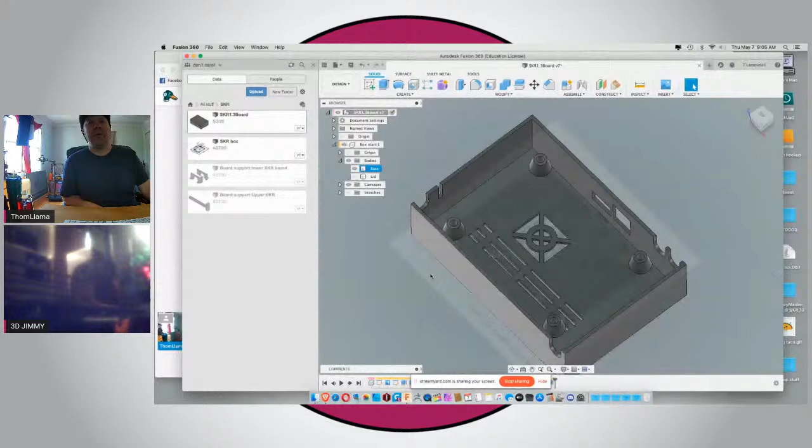So you're going to make a new brain box today? Yeah, I already started the other day, that's what the picture is of. Are you going to put a Pi mount, finish it up with a fan and all the fancy stuff? The other one actually had a fan on it. It's got a fan cut with screen wires running through it, but I never put the fan on because I never put a cover on it, so it's never needed it.

Almost all of these processors, people don't realize, if you put the heat sinks on them and leave them in open air, they don't need fans. Fans are for emptying the air out of the box because heat builds up in the box. If there's no box, there's no buildup of heat, within reason. They will overheat if you leave them in the sun, but if you set them standing up, heat travels up, so as it heats up the air naturally flows over it. Convection, yep.

That was a pretty cute little printer Angus had there yesterday. Yeah, that was kind of neat. I only watched like the first half hour of it. When he actually got it printing I was amazed. That thing obviously used the M3D Micro base case. There's a lot of changes in it, but the base idea, the case, the cube, is almost exactly an M3D Micro. It's definitely an improvement on the M3D Micro. I didn't watch the whole thing.

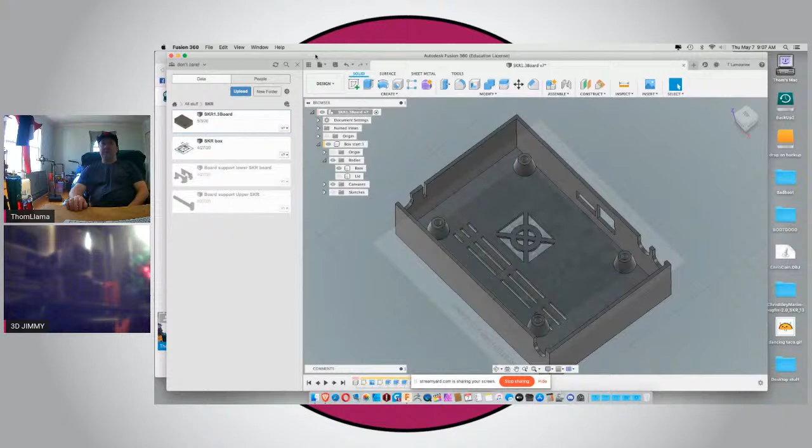Yes, you were whining last night. I was whiny. I can't believe I drank that whole thing and I feel as good as I did. There's literally nothing left in the bottle. I know you're just on the mini screen, but you can see that, that's all that's left, I drank the whole thing myself. I went to bed last night thinking wow, I drank a lot of wine. Got up this morning like, wow, I don't even have a hangover. I don't feel 100% though. I will say I am definitely feeling the side effects of drinking a little too much last night. And I didn't even get that crazy, usually I get a little extra goofy when I start drinking.

Yeah, it looks like the wine mellowed you out. Yeah, I was going to say, I think toward the end I was getting more and more mellow. I was more hyper in the beginning than I was at the end. You were kicking back with your feet up on the desk. I do that anyways.

Okay, what else do I got to add to this thing? Where's the Pi mount? It'll be on the lid right here. Okay, when I get that far, I'm not even worried about that right yet, I just want to get the board made up. Because the biggest thing now is, with the box I have it in now, I just slapped it in there. I just made a box, put some vents in it, and cut some holes in it for these things for the wires to come in.

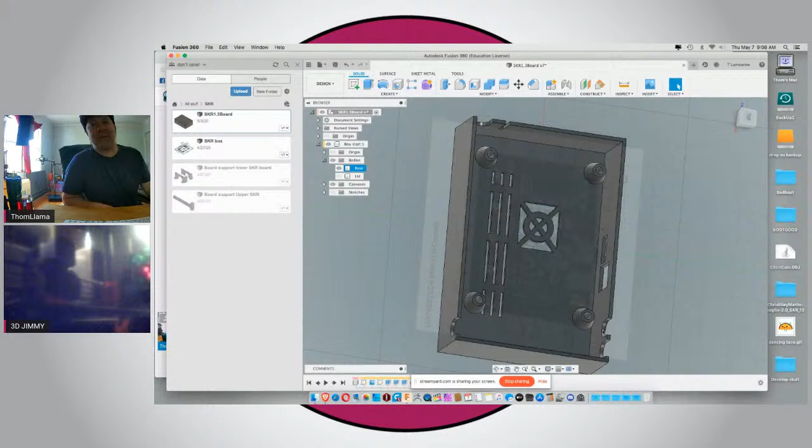But I didn't leave access to my SD card and the USB access, which—I made the box big enough so I can get them in there, but it's a pain in the butt. Otherwise I just keep the box, there's really nothing wrong with it, it's just I can't get to the USB plug and the SD card.

Put some vents in the top. I will, I put them underneath the Pi when I set the Pi mount up, so it draws air over the Pi as it pulls it in. This is really the only place right here at the processor and behind the drivers—if you keep those cool, everything else will convect out through the board. Those are your two hot spots from what I understand. And the MOSFETs a little bit.

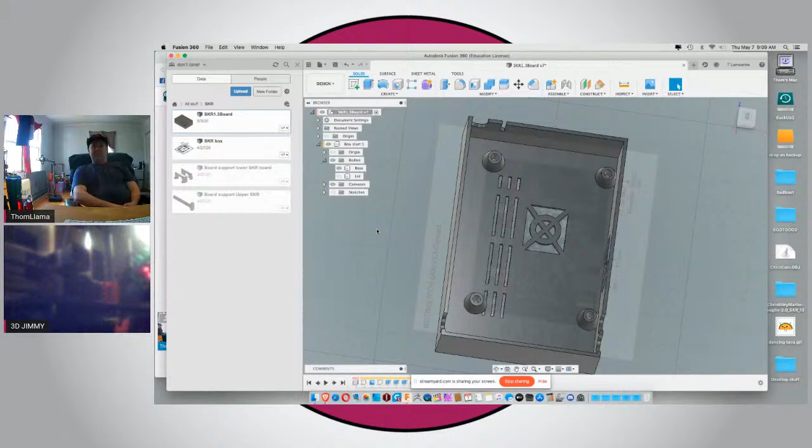Yeah, I didn't think of those, maybe I'll put some vents. I almost think this is too big right here, I should probably make this smaller because it's going to overdraw here and not draw air out of here from the fan.

And actually, I think in the lid, I'm going to put inside the lid here, right where the stepper drivers are. I'm actually thinking I'll put a channel in it, then put the fan right here above the drivers. That way it's got airflow right over them. That makes sense.

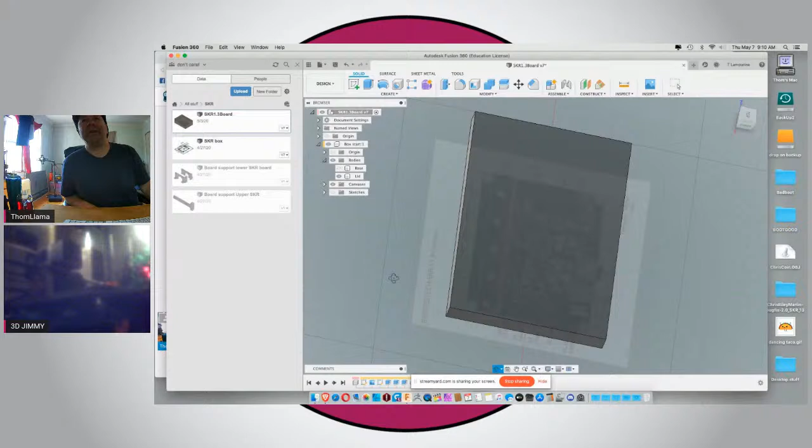Even if it's not directly vacuuming in front of it, it gives it a kind of channel. It'll draw out through the channel. The channel will direct the airflow, it's not really going to restrict it. It'll still pull from the sides and everything, it'll just have a direction. Hopefully, that's my concept. I have no aero, fluid, any kind of dynamic knowledge other than, okay, I read this might work.

I have no actual education in there.

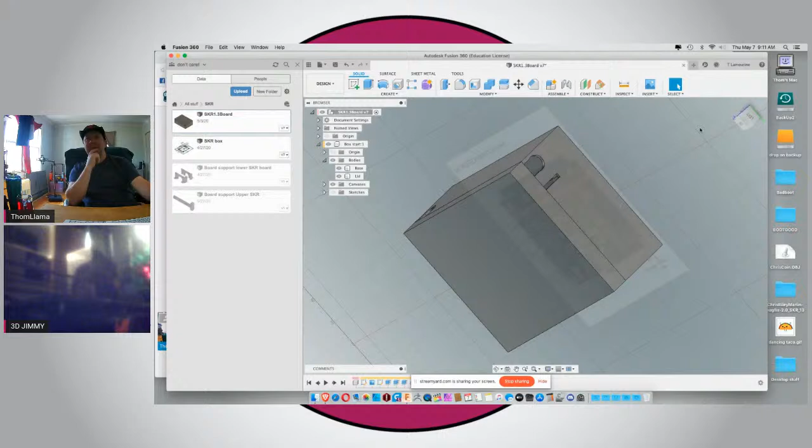Oh, I got to put the fan port in there, which I can't do because I moved it over here, didn't I? And yeah, so I really can't do that because the fan's going to go right here and it's kind of offset, which is kind of annoying. I got to figure out a different way to do that now that I think about it.

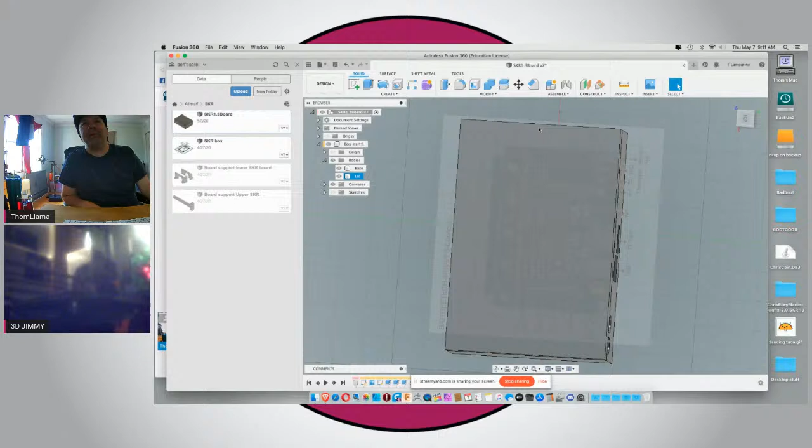Because the biggest problem are the stupid ribbon cables right here. I don't know if you guys can actually see that, but the ribbon cables plug in right here at the LCD, and then they go along the top of the box and come out this slot, which is fine. The problem is they're big and flat and obnoxious, and they don't fold easy, and it's just obnoxious. And if you put the fan right here at the top, they end up blocking it. There's just no way around it, you can't get them to go neat. I hate ribbon cables, ribbon cables are obnoxious.

I really wish... actually, I think someone does make a regular cable bundle style ribbon cable, don't they? It's round. Can't you just split the wires and wrap them?

Sure, probably, but then you were talking about me doing it, and that's where the problems arise. Because I'd end up screwing it up somehow. Well, it was a thought. I would short something out or strip something wrong or make something screwed up, something would not be correct. Well, then it wouldn't be a proper llama string.

Yeah, what else am I missing? I feel like I need another hole on that side, and I can probably do with just one hole on this side.

So I think I want to bring it into the bottom. Do I want to bring these into the bottom? Do I have enough oomph? Instead of bringing them into the side. I don't know, I don't mind throwing it in the side, I guess.

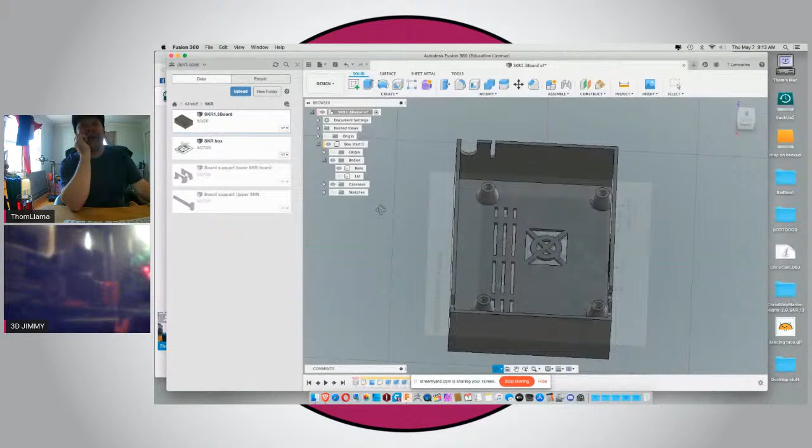Well, this is bigger than every other one, like the Prusas and stuff. Because the biggest thing I have is I'm holding it a lot off the back, it's spaced up off the floor of it. And I was thinking that some of the thermistor wires and stuff I could actually run behind the board.

That's why it's up like, I think, what did I do that at? I wish it would let me select a face like I always want, and then that stupid thing would hide. How high did I make it? 12 millimeters, which is a lot.

So that gives me a lot of space where I could literally run wires behind the board. Like even with the plug, I should be able to slide the plug and everything for the thermistors and limit switches and stuff like that. I should be able to just run behind the board, that way they're not out in front being tangled up with everything else.

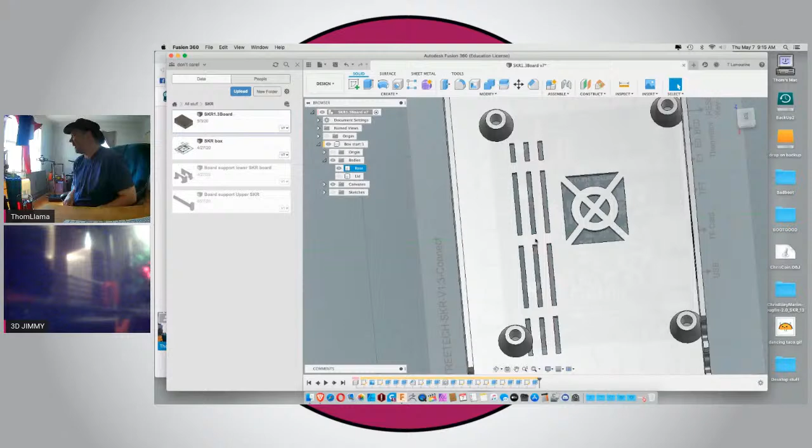Because the biggest mess is like the Z motor and stuff. The Z motor, I got that splitter on it that I did make myself, and it actually works. But it is kind of big and bulky because I'm not great at soldering, so I made everything a little big and long, and it's kind of obnoxious. But it does work, so I'll give myself that one.

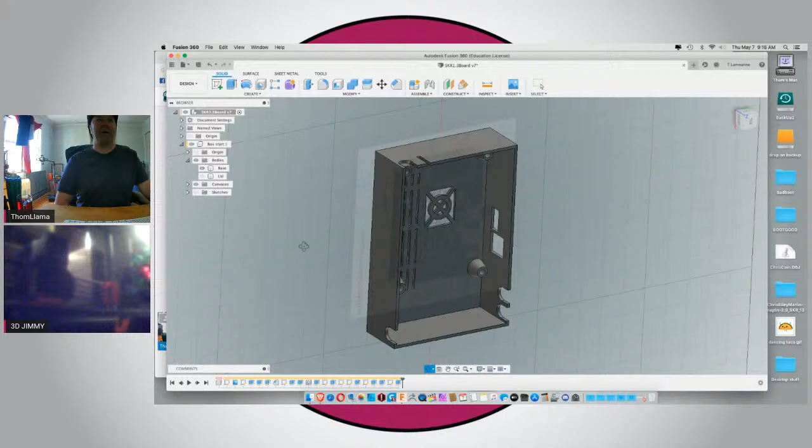And I think I want to space it off the frame. So what do I need to put in here? Some holes, that's what I need. Top. I can close that out so I have more space. So those two are there, that one's there. What else? The fan, I want the fan in here.

I need to put a fan hole.

What got moved? Yeah, just hit capture position. It won't hurt you, it's good for it. Nothing should have moved, why was it moving stuff? I didn't move anything, I didn't want anything moved. Oh well, I'll figure it out. There's no movement thing in the timeline, so it went away.

All right, so a fan is 40 millimeters. But the actual mounting hardware is a different size, and I can never remember. You can pull in a 40-40-10 fan from McMaster Carr. Yep, I could. Or quicker, I could just measure it.

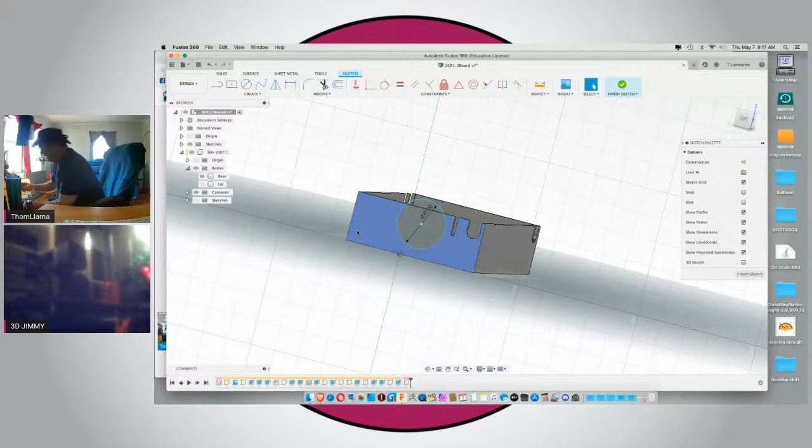31.9. I bet it's actually 32. At least that'll be close enough. Yeah, 32.

So I do this, and I come out... wait a minute, how's that possible? That can't be right. I didn't zero out my little calipers. No, it's still 32. How is that possible?

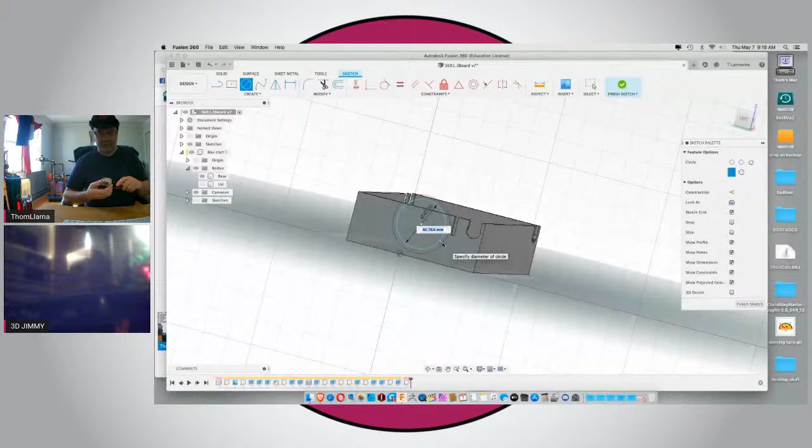Isn't this supposed to be 40 millimeters? Oh, because it's inside of it. That's right. No, that is right.

Escape. I need a square box from the center, because then it'll do it. Yep, 32. 32, tab, 32. And that puts my little mounting holes where I want them.

And let's bring the lid back because I'm going to want that. Oh, and then I just screwed up my box because I didn't enter it. 32, tab, 32. Turn.

Then I can draw my little sketch, make this thing in construction so it doesn't screw with me, make these things. I want it like 4 is good.

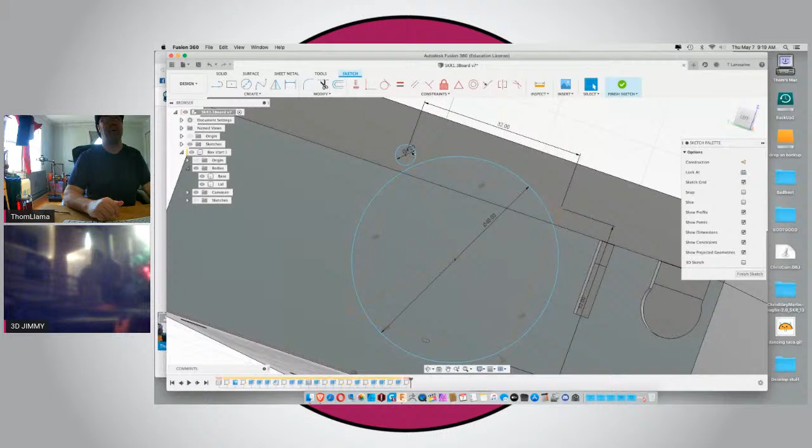Okay, I wish it would let me select them all and do equal. Yeah, I hate that, it used to. I remember back in the beginning it did. I could select that as the key and then just select as many stupid little circles as I wanted to, and it would just make them all the same. Now you've got to sit there and click back and click back and click back and click back and whack!

Oh crap, dimension, let's see. Dimension this to this, what is it? 25. Dimension this, this is escape. 8. That was 25. I don't remember how big I made this box. The thing I liked about Unigraphics, 27.

So if I make it 26, I could create a parameter by picking the 2 corners of the box, and it would become a parameter, and it would stay associative to whatever I did on the model unless I destroyed it. Yeah, you can do all that. It just becomes confusing to me. I should start using it because it actually makes it less confusing in the long run.

But let's see, we have it at 50, so I'm going to go 52 and shift it away a little more, even though I probably shouldn't. But I want it away from the tables.

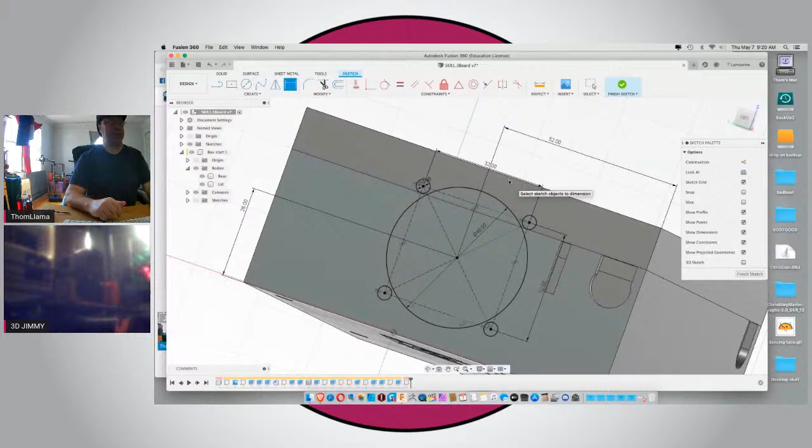Escape. I want to put a hole right here somewhere, doesn't matter where, about 6 millimeters for the wire to go through. Let's lock it in place just with any old random number. 20 sounds good.

And we'll lock it this way off of this side, since that's the side I'm using for everything. We'll go... 79 sound good? Let's just go an even 80.

Okay, I want that, and that. That, and that, and that. And let me select that, and that, and then go to solid, and then go to here, and then bring the lid for a second. I'll go to this face, and then bring the lid back, so make sure it cuts through it, and done.

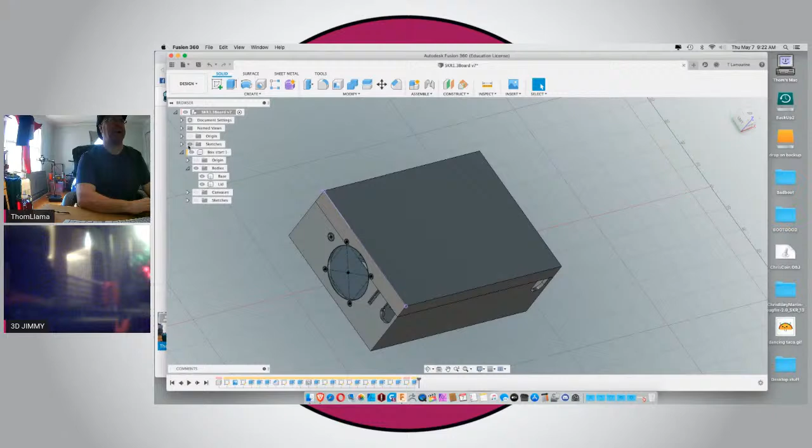Okay, let's go away. Oh crap, I didn't start in the frickin'... I didn't click this little checkbox. I hate that. And I don't really like this.

I don't mind it being part of the lid. I don't mind having to take the 2 screws out of the lid to get the lid off and using the fan to help hold the lid into place. But I don't like where they're positioned.

So let's go back to this sketch, which I wish they'd let me just drag it. Will it? Can I drag it down into there? Yeah, I think you can, just tell it to go down in here. No, it won't let me. It'll go above it, but it won't let me go into it.

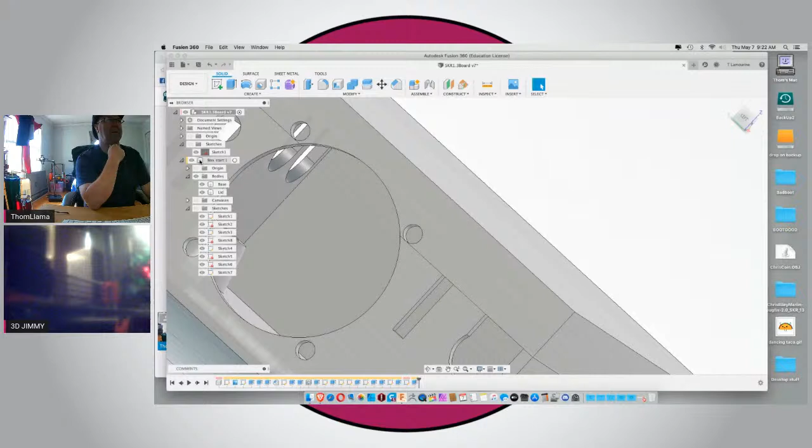The solid bodies work, I think you can drag those. Yeah, but now the sketch is sitting here. I mean, it doesn't really matter because there's only the one item, but edit sketch.

So I want to make this go that way a little bit, so I will make it go 26. Let's make it go... Oh, how far should I go? 30? That might be a little too much. 28, yeah, I don't really... 28, I think, is still too close. 28, yeah, because that leaves this area still kind of weak here.

Right along. Why won't it let me select that body? It's acting weird.

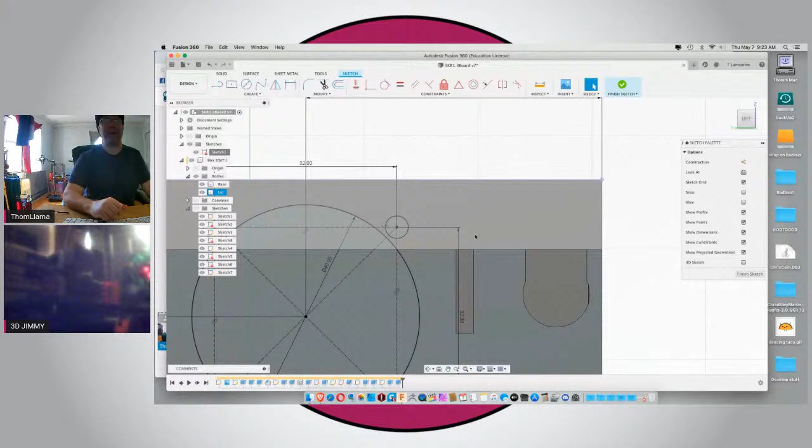I guess that's not bad. How far is this off of this? It's only 8 millimeters off. The board is 12 millimeters off the back plate. There's 2 or 3 millimeters of thickness of the back part of the box, so we're about 10 or 11.

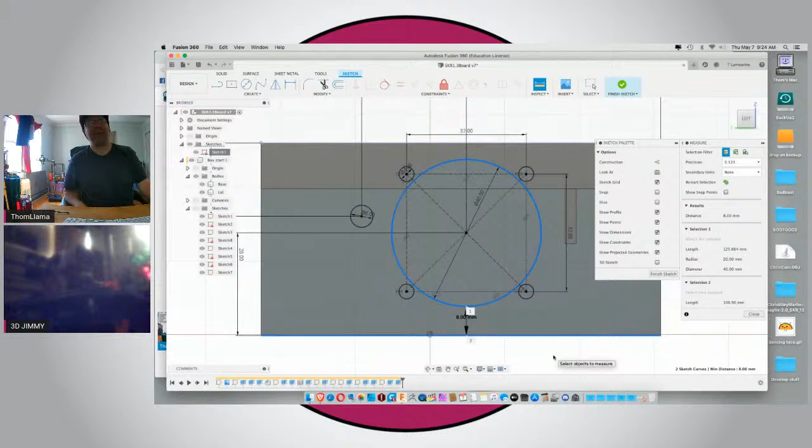So that'll be pulling air from up the back just a little bit, in theory. I don't know about reality, but in theory, I guess that's not bad. Because the actual board is right here, it'd be right in this area. So this bottom part of the fan should, in theory, be pulling some air from behind the board. Am I wrong? Am I right? I'm just guessing.

I don't want to put them all in the base. There's a reasoning behind my madness. I use the fan to help hold the lid into place. Mr. B wants you to put it all on the bottom of the box. I know he does, but I don't want the fan at the bottom of the box.

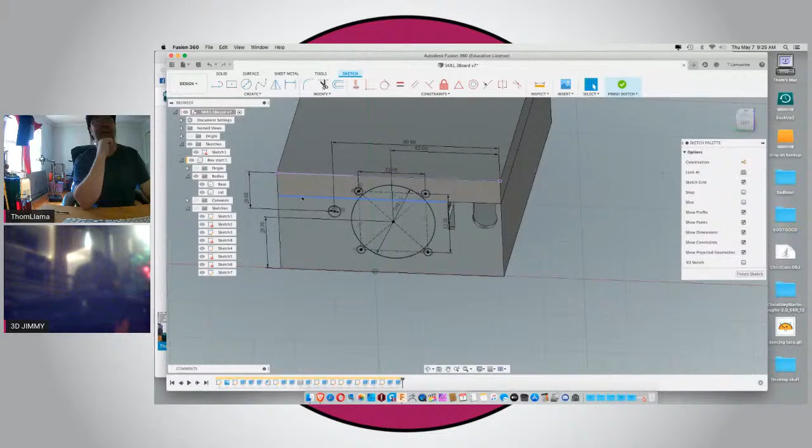I want it to help hold the lid, and I want it pulling the hot air from the top. Heat rises, so if you put the fan at the top, it pulls the heat out of the box. I don't want to be pushing air into the box, I want to be pulling air out of the box.

Finish sketch. Mr. B is suggesting that you make the area around the fan part of the box and notch out the lid. I want it part of the lid instead — it helps hold the lid on, helps hold the lid in place.

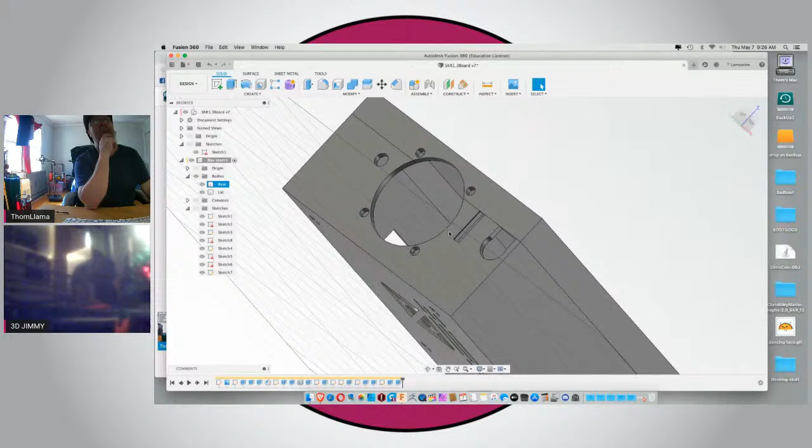And it also makes it so it pulls off. It's all about the height of where the fan flows over the board. There's multiple reasons, I don't want it just on the bottom section of the box. I know it sounds crazy, but there's a madness behind my madness.

As long as you're having fun. Yeah.

And like I said, it helps hold the actual lid in place, so I need less guide pins and crap, if that makes sense.

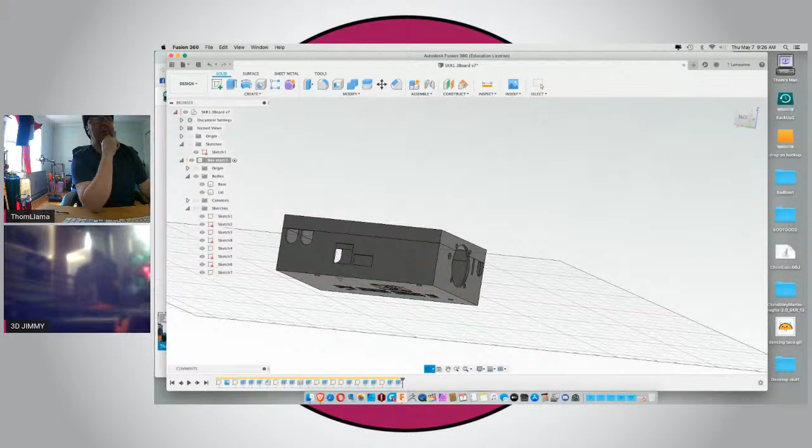There's something else I'm missing. I know there is, and I'll go to print it, and then I'll mount the hole — oh, the actual mounting holes. Duh! That'll come in handy. I mean, I could just take a drill and punch holes in it wherever I want.

There's always blue tape. Yeah, blue tape doesn't really hold this. I know, I could hold the lid on with blue tape.

Still thinking this is too much airflow right here. It's going to draw too much and not let these work as well. I don't care, I think it'll be fine.

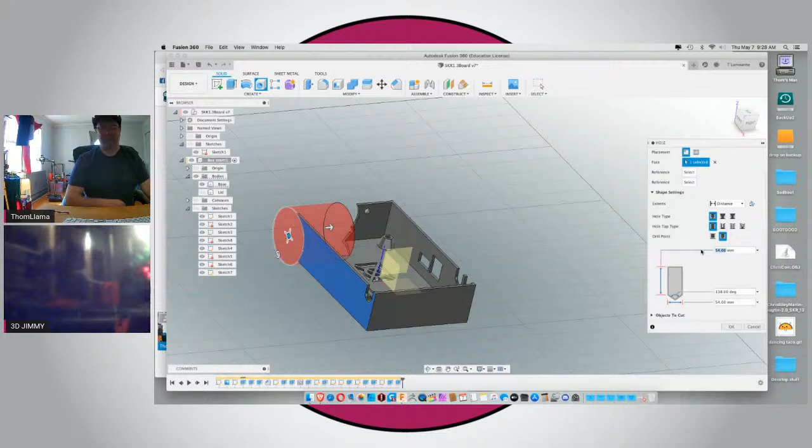So I have to put the mounting holes in there somewhere. Let's put a hole — not that big of a hole. Why is it... I wish it would default to something you use on a regular basis. It just randomly comes up with a number. Yeah, it kind of keys off the last size hole you used. This is nowhere near anything I've ever used. It never does anything I use. It's weird.

I want 5.5. 80 — let's get rid of that, and reference it off of here. I want to go 10. And off of here, I'll just go, I don't know — I don't remember how long I made this thing, but we'll do 20, so I can clear everything.

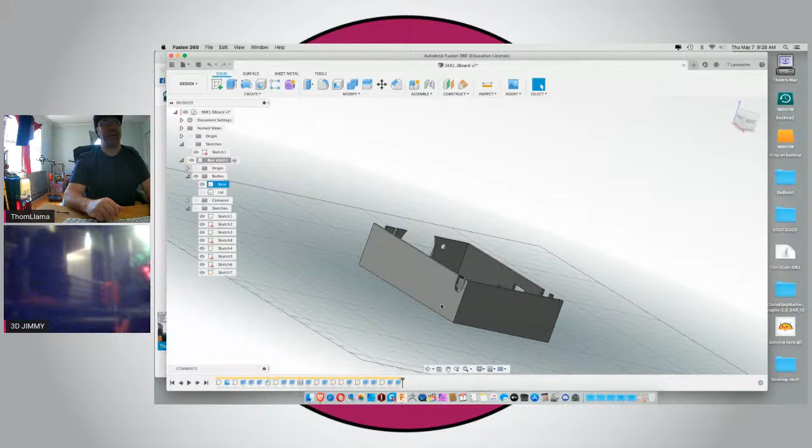And that looks okay. Sure it does. And then let's put another one here. Command Z, Command Z — don't want either one of them, because I'm going to go all the way back to the beginning.

I'm thinking about putting standoffs for the mounting instead of trying to mount it flat to this face. For one, I'm going to be printing on the Llama Core, and I don't think it's perfectly square anymore — I think one of my belts slipped. So if I make that box square, it's going to try and pull the frame square off the tower, or the tower's got to pull it square, you know what I mean? Whereas if I put standoffs on, it doesn't pull as much. Does that make sense? Okay.

I think I'm gonna... how's the weather out your way, Mr. B? Is it still kind of cool out there, or did all that mess pass by?

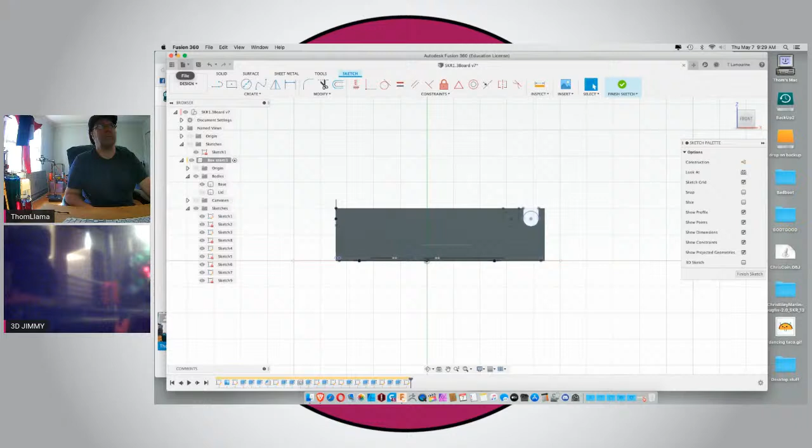Let's do something like corner start.

And let's do 20 because it's 20 millimeters. Let's just do 20/20 because it's a piece of 2020. We'll do the same thing down here somewhere, not quite at the bottom. 20/20.

And we'll dimension it off here, a set amount, make it an even 8. And let's dimension it off of here, a set amount. I'm going to want more than that because then this will be all in the way. Let's go 15.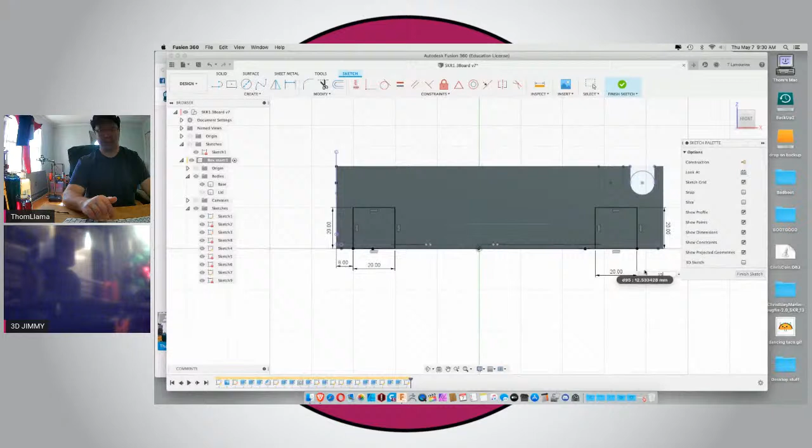Finish sketch. And the sketch is all the way. Whoops, I don't want that. Why won't it let me select that? I hate that. Let me select that. It's just obnoxious, stop that.

The one in front that I'm currently working on is the one it should try and select, wouldn't you think? Yeah, it's kind of funny that way. It depends on where you put the cursor. It's gotten worse, it never used to do that.

Let's just do like a 3 millimeter bump off.

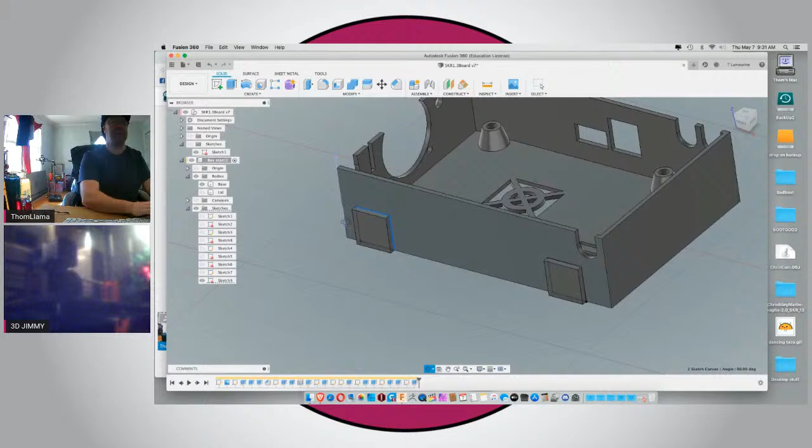Do this and do it. Oh, and you used to be able to select the edges beforehand, and now you can't select the edges beforehand. So I have a habit of selecting them and then trying to use the tool. Now you got to select the tool and then select all the edges, which is really annoying to me.

What did I do, 3? Do 3. Oh, not 30, 3. Yeah, that'll work.

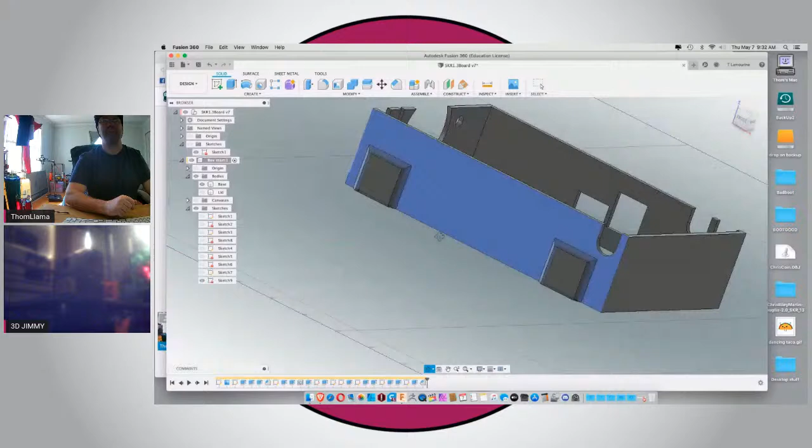That kind of pads it off the frame a little bit. Do the same thing here, but let's go back to here so I can use my push pulls and all of that the same.

So can I do it right in the corner here? Can I get to it? Will anything be in the way? Kinda. Let's do it just a little off.

20. Did I just do 2? Yep, 20. Turn.

And then do another one over here. And this one. Oops, corner. I think I will do right in the corner. 20, 20.

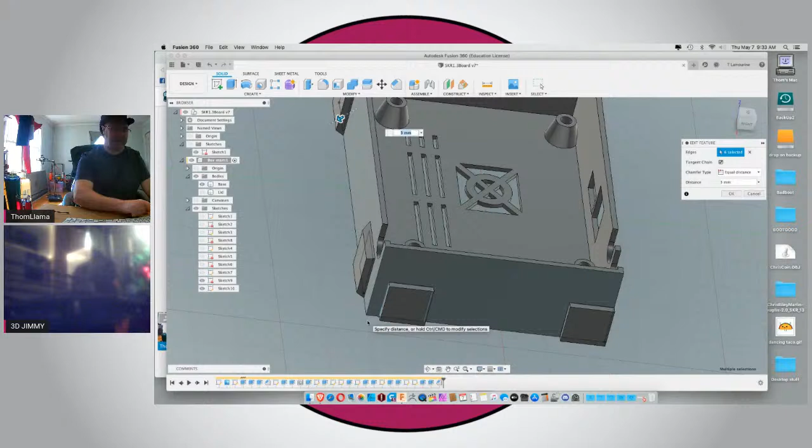Actually, I think I have to pull these separately. But then I can use the 3. But then I can do this, and then this. But then I can edit this and add that one, and that one.

That one. You really need to like change the color combos too. That one, that one, and that one. Okay then, that gives me a little standoff to the frame.

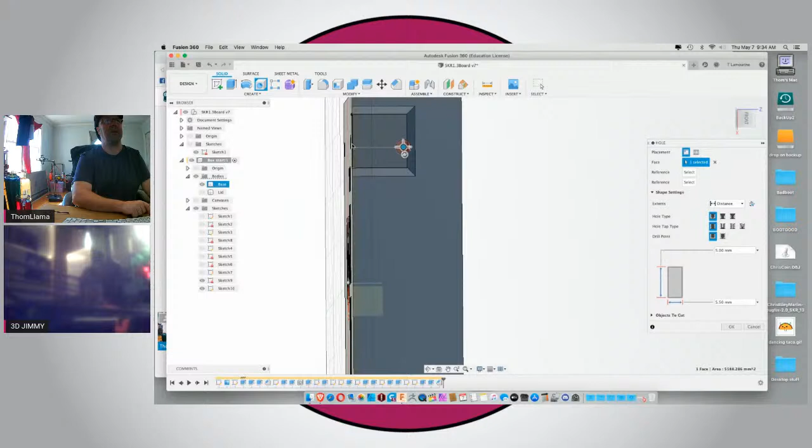Now I'm actually going to put the hole on the inside, right there. And I'm going to tell it I want 10 millimeters off of that, and I want it 10 millimeters off of that. And I want to do this, and I want it to do however thick it's got to be to go all the way through.

Is it going all the way through? I don't think it is. Make sure it goes all the way through.

And oh, I don't want it off of that. I want it... which reference did I do wrong? Damn it, what did I do? Screwed up. There, and I want 10 millimeters off of that.

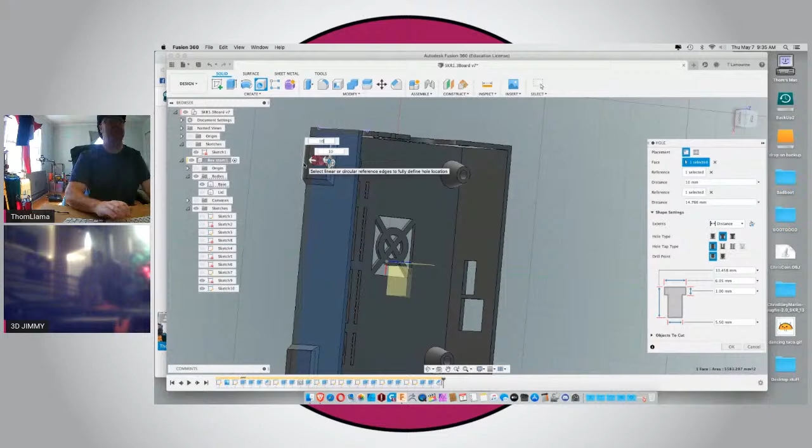10. And I want 10 millimeters off of that. 10. I used the chamfer's edge, not the actual structural edge that I originally did my 20, 20 on.

All right, so I want this to be 9 because that's the size of the cap of the head. Oops, not 90, but 9. And I want it to be 1.

Actually, I want it to go 2, so it sinks right in. And 5.5. Good. That way the head sinks right in, but I got plenty of material because I got all this build out, right? Great.

So let's do another one right here. And I want it 10 millimeters off of that. 10. And I want 10 millimeters off of that. 10.

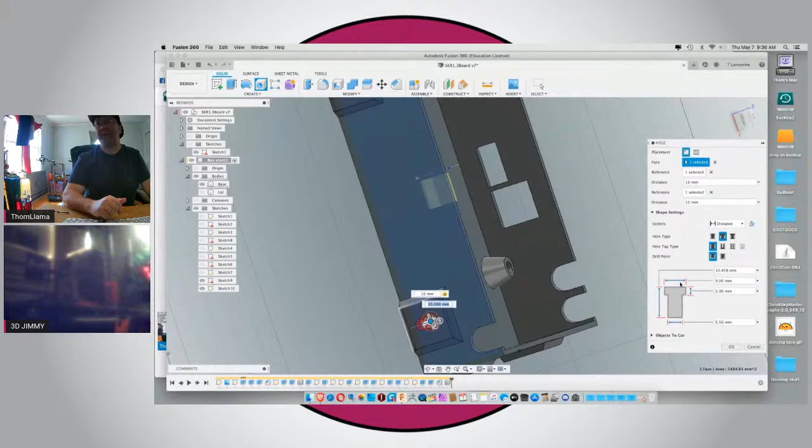That should copy everything over. Correct? 2, 9, 5.5. Yep. Yeah, it'll stay the same. Yeah, as long as I keep using it at that point.

The minute I restart, though, it screws it all up. And once again, do 10. 10. And it should be okay.

Why didn't that look right? Well, I guess it is. It was just the angle I was looking at it. That's definitely in the center of that.

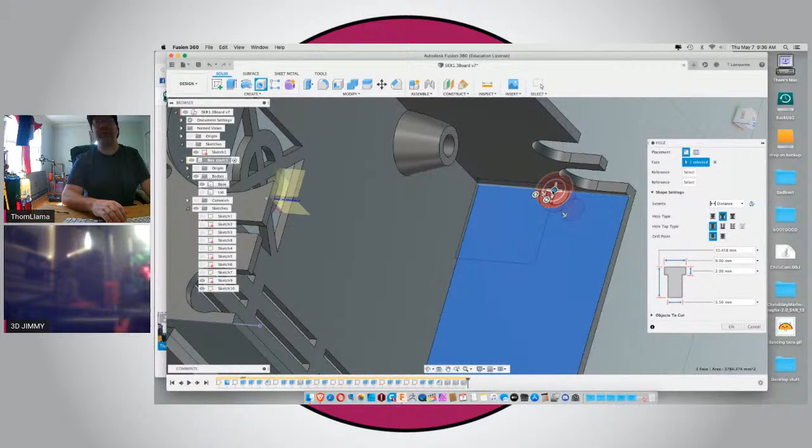Let's do one more, and we're done with those. And of course, it has to do it off the edge for some stupid reason. And off of this edge, 10. And off of this edge, 10.

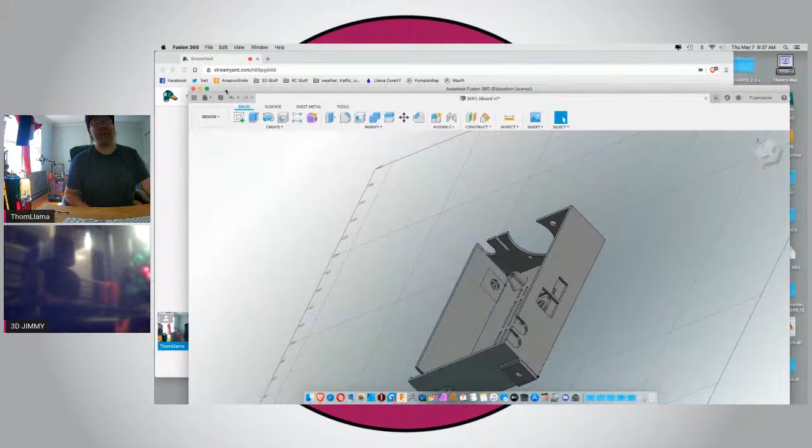You can make a flange around the fan to hold the lid. Yeah, but I don't want to make a flange around the fan to hold the lid. I want the fan to hold the lid. I don't know why, I just do. Leave it alone, Buttram.

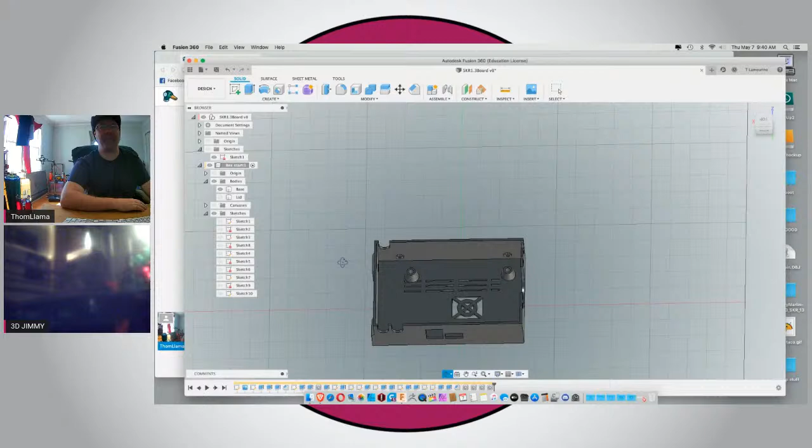Okay, now all I need is lid mount, and I can actually print the base. We can do the lid later, because I know I've screwed something up. Something won't line up or won't be right, or something along those lines. If at first you don't succeed, print again. If at first I don't succeed, screw it up 4 more times.

What size are those nuts? I believe they were like 7 millimeters or something funky like that. I think I need a new set of calipers. 5.4? What? Oh yeah, they're just M3s. They're only M3s. So if I do 5.6...

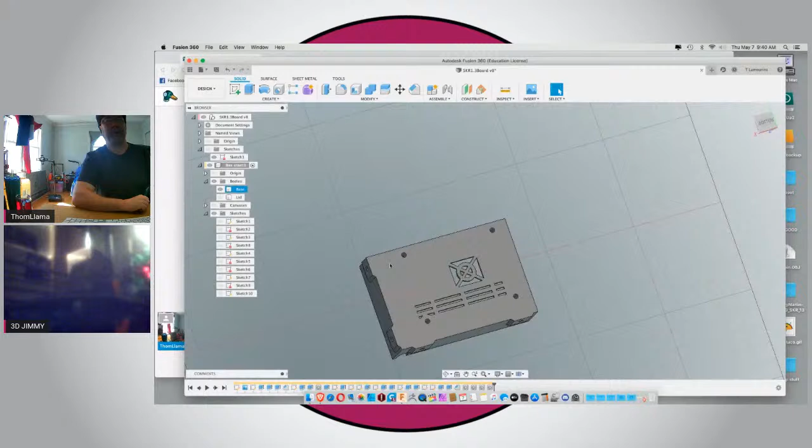Right here, do another sketch. And right here, I want to do polygons, I want to do circumscribed polygon. What is half of 5.6? 5.7, 2.5, 5.6, 2.8. So what'd you find, Robert? Anything good? 2.8, that ain't right.

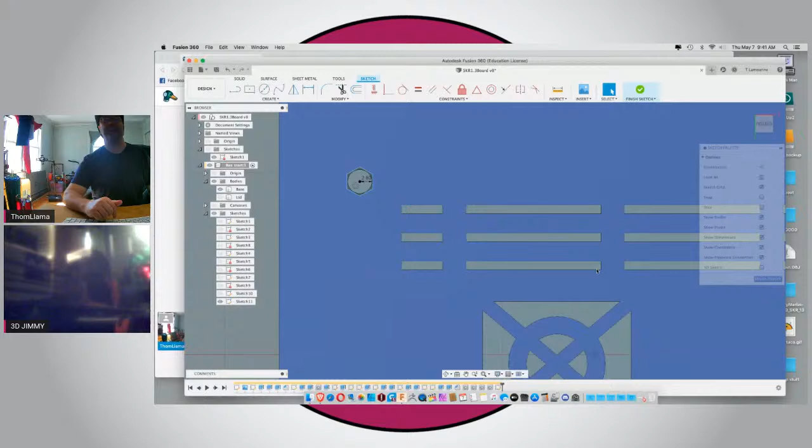I wish they'd let you do total width on polygon, but that's 5.6. Close. Finish sketch. How big did I make those holes? Did I make those things way too big?

I'm thinking I did, they look kind of big. They are kind of big. 5.25, that's too big. I want 4.25. And I want this actually 3. No, you know what, I'm going to leave it at 2.

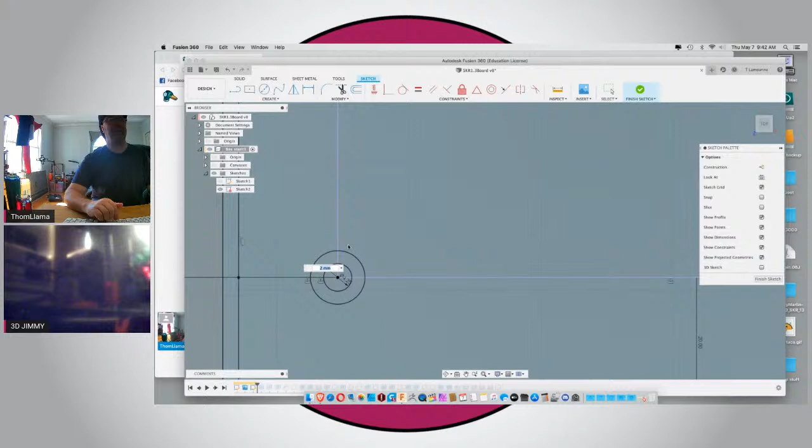I got to do all of these because if I remember when I was starting this, I just did them all individually. What the hell? 4.25, why is it doing that? What is all that crap? Something, did I not enter something? Oh, that's what I did, I started editing that. 2.5, let's make it.

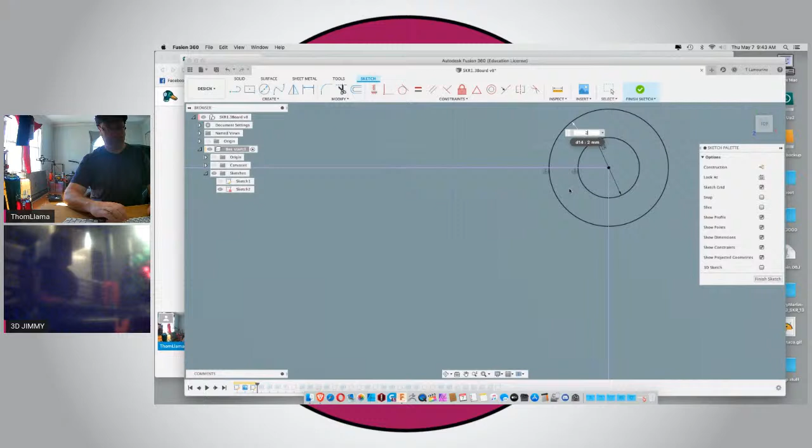Smaller stud, but much smaller hole. 4.25. 2.5. 4.25. 2.5. I'll probably screw something up I did. 4.25. 2.5, 2.5.

Finish sketch, go all the way to the end and let's see how many things crash. Nothing, nothing crashed, what's up with that? That ain't right. All right, that's a good line. 2 Titan extruders. Are you doing a bare build from parts, or are you taking apart a Prusa?

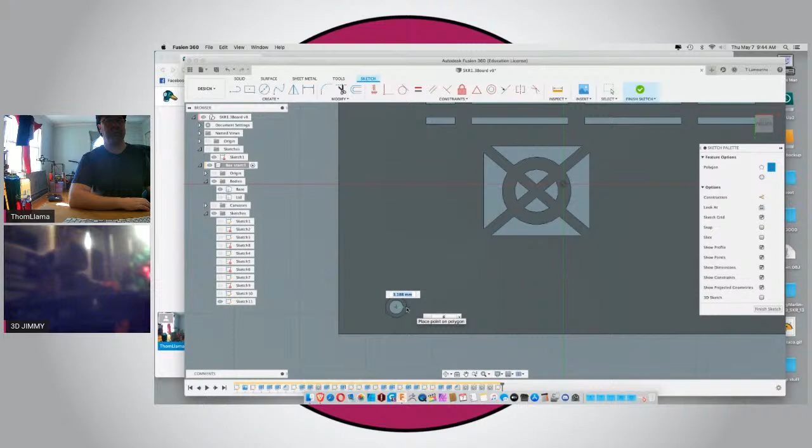What did we say it was? 2.6? 2.8? 2.8, right? 5.6 half is 2.8. Yeah. I remember when it used to remember what I was doing too and just let me do it again over and over. 2.8.

Why isn't it locked? I lock it onto the hole. Why is it not? Because if you go to geometric constraints and make the vertical line vertical, it'll lock it in.

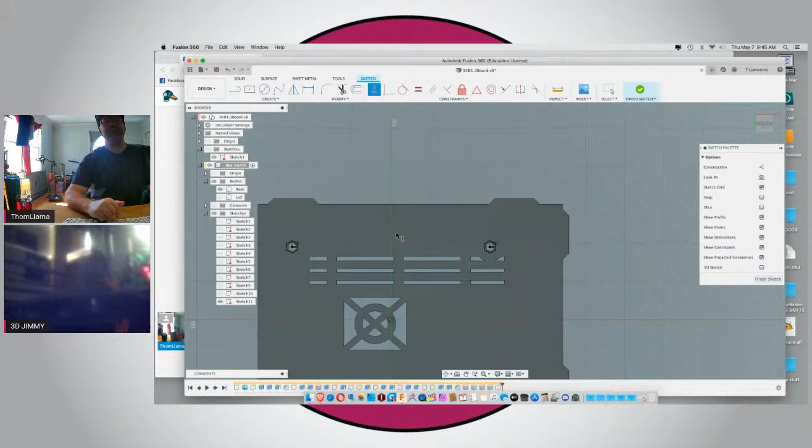They really need to redo their colors, it gets confusing. The biggest thing I don't like is the constraints are all black now, and their dimensions are all black, and sometimes the dimension lines are over the constraint lines, and you can't tell which one's which. I really wish they'd change the dimension lines to a green or blue or red or something. Move the dimension. Yeah, but sometimes you can't, you never know where it is. If you're doing a really complicated item, sometimes the dimension lines overrun and look like each other, you know what I mean? Yeah, if you zoom in close enough, you'll see the difference.

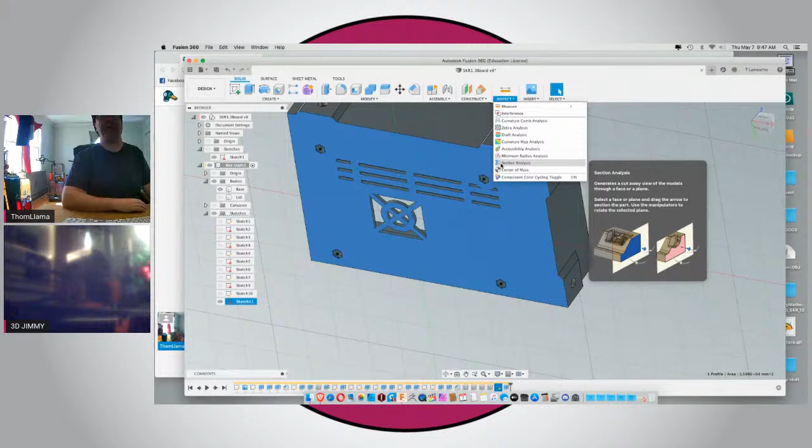1.5 should be good, hopefully negative. I got 2.5s I turned into bears. How much crappity crap do I have here? Where's my section analysis? This one. I want to go this way. Oh, there's plenty of material there.

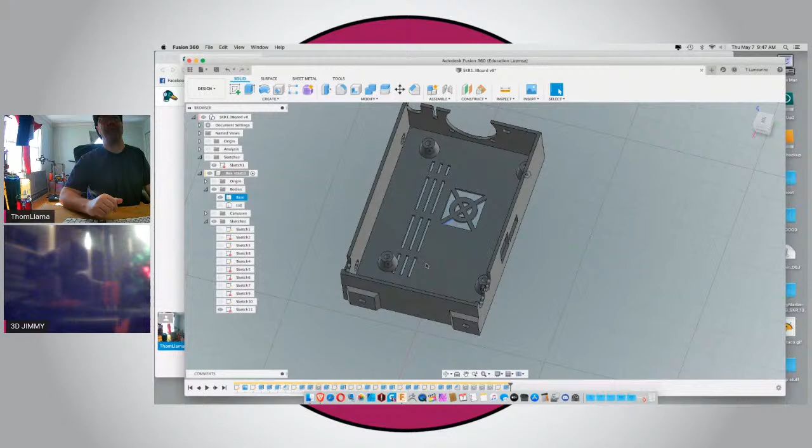What I like about the Bear, Robert, is that it does work great, but it's so easy to attach accessories - camera mounts, custom boxes, LEDs, all that stuff. It's so easy to attach to those extrusions. The frame is really stiff, it won't shake, like the Prusa flat plates will shake a little bit. That's what I like about the Bear.

Let's see, I'm gonna leave that. I was gonna change it, but I'm not gonna. What color Bear frame did you get, Robert?

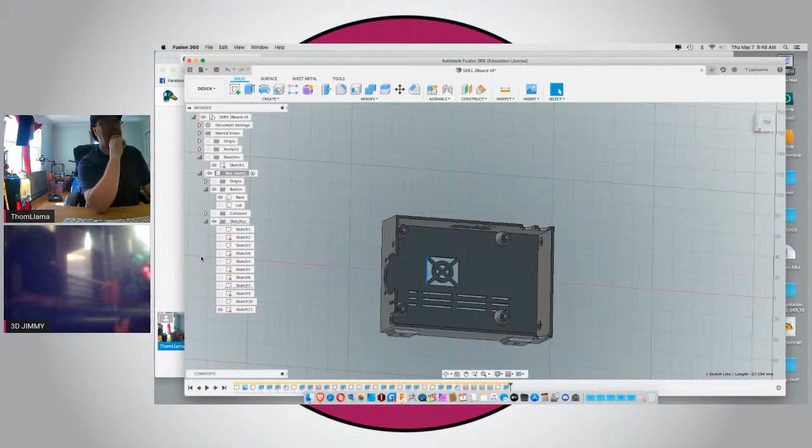Hey, Michael. Not watching chat if you guys haven't noticed.

So now all I need to do is put some kind of guide or mounts for the lid to screw to the box. Weren't you going to put a little channel in there? Oh, that's going to be in the lid, right? Yeah, I'll put some lips, but I still need to put like some kind of screwy something to screw to.

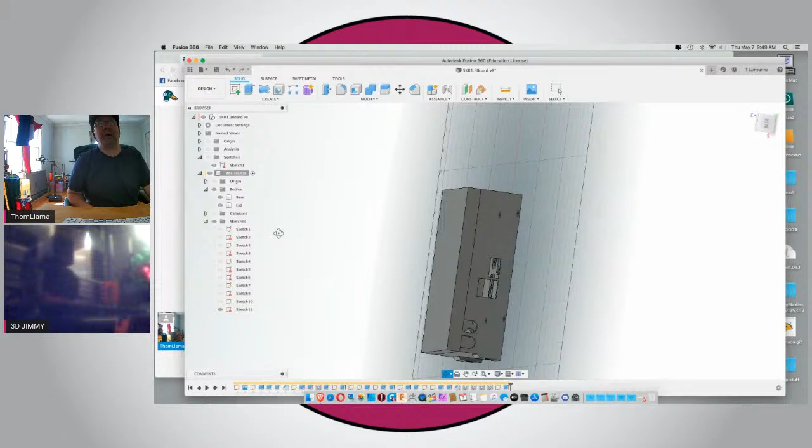Got any magnets? Why don't you make it a magnetic lid? Make it a magnetic lid - yeah, that would have to have magnets and stuff, which I don't have. I do a lot of stuff with magnets, but I don't have magnets, so doing the magnetic lid is kind of counterproductive.

I'm really not too worried about the lid, other than I gotta make the mounts for it now if I'm going to print the base. I'd like to just print the base today, but if I'm going to make any mounts in the base to hold the lid, I got to do them now. What color are you going to make the printed parts, Robert?

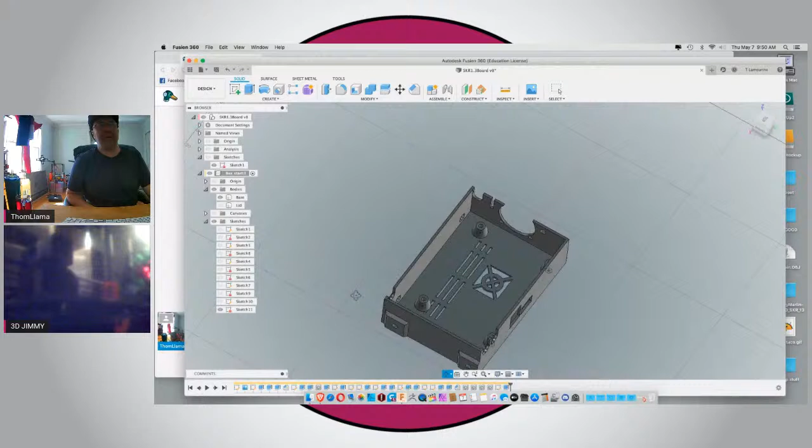I really don't need this there. In all reality, this could be moved over, or this one could be moved up. I got one green frame and one silver bear frame.

Sketch, let's do this like 30. Move it way up the frame. I did a green on green printer, and I did a silver frame with - of course, it's right up there.

And that one's lined up with that, which is going to make it really difficult to get to the wrench in there. Then you're going to do that atomic carbon fiber in black.

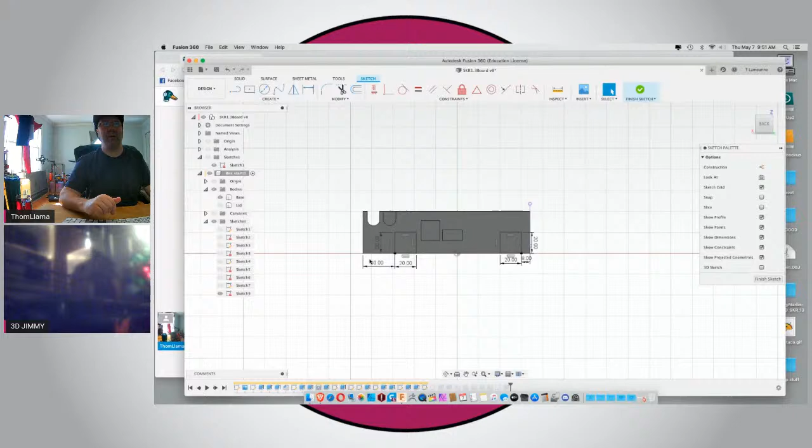Let's do this, 15 again. Do this one like 15. That should kick it away from those studs. Just enough, yep.

I'm almost thinking I should get rid of one of these and just have one slightly to this side of off middle. I think I'm gonna - that way I can get to it easier.

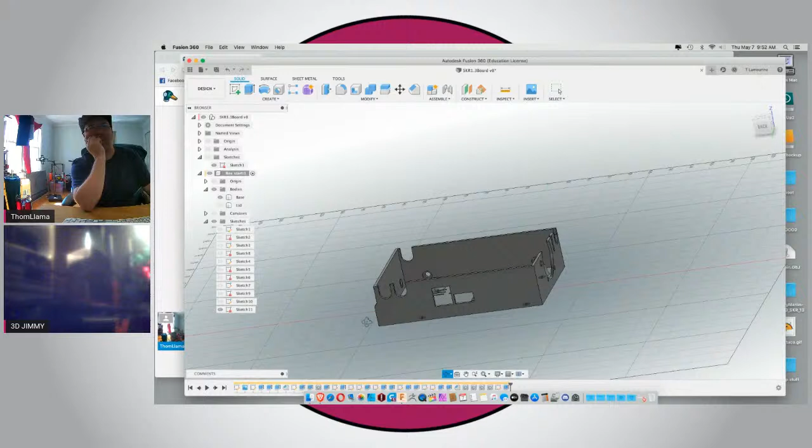You don't really have a lot of strain relief for the cables on that box, do you? That's what these are. How do you attach the cable? I use split loom - it snaps right into this. Oh, okay. This is like a millimeter smaller than the diameter of split loom, so the little ribs in the split loom snap right into that. Yeah, so it's a press fit.

Yeah, and when you put the lid on it, I'm actually going to fill this void with the lid. The lid's actually gonna have like a little tooth here, arcing, that's gonna clamp the cable into place.

Either that, or I was actually thinking about, instead of doing it as a lid, I was gonna do it like a TPU slide-in plug, so I can build it all and have it all positioned, and the lid doesn't need to be there right away.

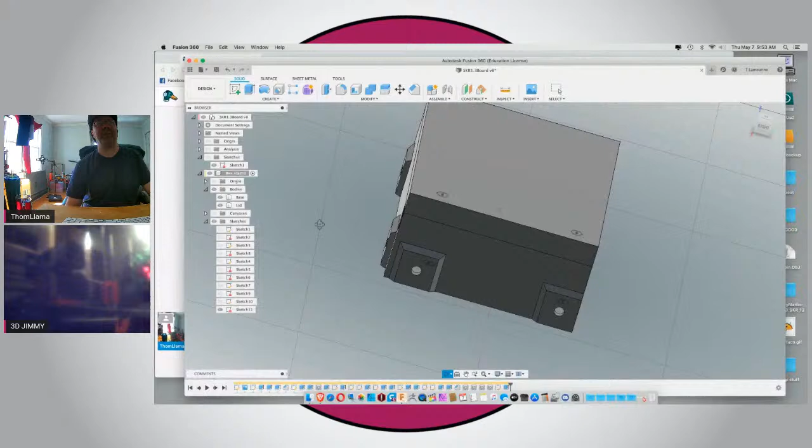Custom squishy grommet - yeah, just to make it, for one, it'll seal the hole so there's no airflow, so the fans are all pulling in my designated hot spots. And just makes it hold, because the one thing I noticed, the one I have now, I put the hole right in the middle of the lid, so it was round and round, not an elongated slot like this.

And the problem is they don't stay in place while I'm trying to get the lid on. So having it deeper, I made these a little bit smaller so they clamp it a little tighter, and hopefully they'll stay in position while I'm waiting to put the lid on, if that makes sense. Yeah, I got you.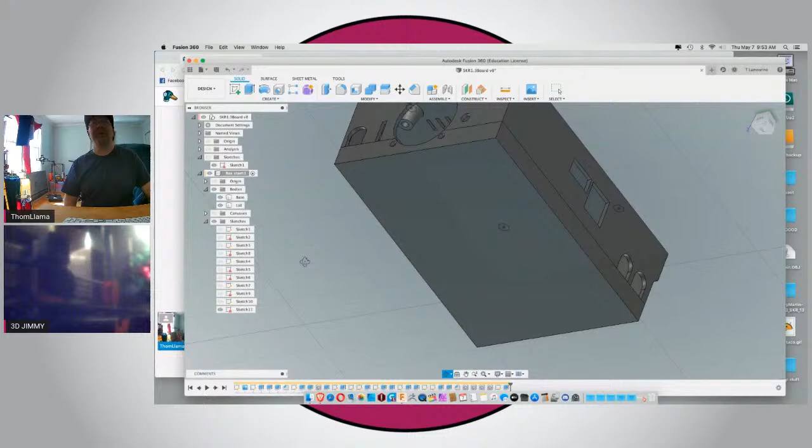I know I'm forgetting something besides just the lid mounts.

Where do I want to put the lid mount? Let's see... analysis, sketches, origins, where's the thing on the canvas? Where would be the best places to put some kind of screw to mount it? Probably right in this corner where there's pretty much nothing on the board.

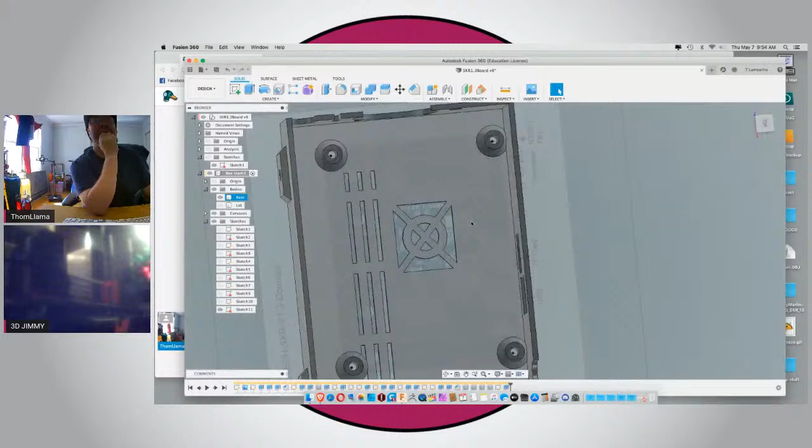Which you really don't need if I'm using the fan. And then down in this bottom corner somewhere, right around here. Or right here. Same problem I got, Robert—you got to get a spot to work on and build printing.

One here. I don't use this, so that doesn't matter. That's for the touchscreen. I can put one right here and one right here. And that really should be enough for the lid, as long as I put guide pins in here so it lines all up to the rest of the case.

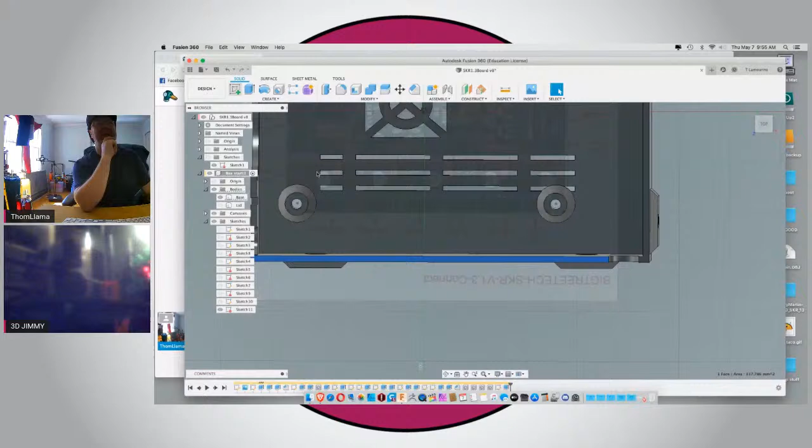Which I like that idea. Okay then, so make a sketch here. Why does it do that spinny, frickin' annoying thing?

It never stays in the orientation you're working in. It always spins it the minute you go to make something. It goes to a sketch plane. I know, but it spins it when you're looking at one orientation or another already. Kind of annoying.

So if I put it slightly diagonal and go like this, say 20-ish—what's the wrong one? 10, 20... I say 6. And enough of a grab hold? Yeah, it should be. Make it 7. Not going to be in the way of anything? Probably, but not terribly.

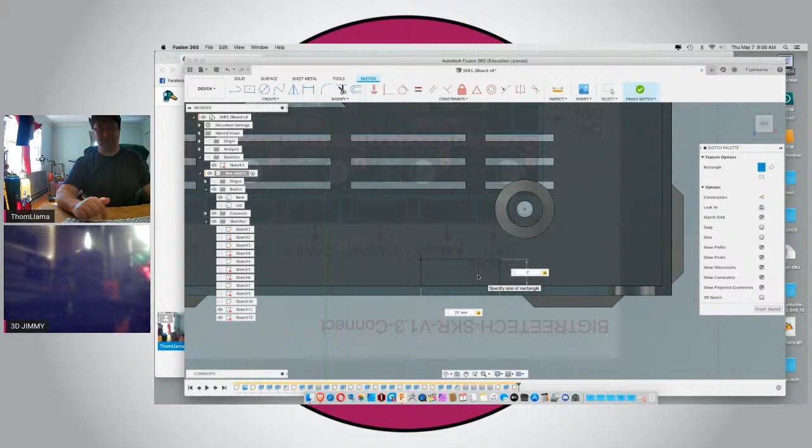Turn. Dimension. Escape. And it's still got that selected. I'm going to go off of here to here. Make it an even 42. Put that down—works for me.

Well, let's do one over here, right about here. And I need to project this face, so I'll walk onto it. Okay, go away. Do the corner, do this thing, do it right around here. I want it corner, select, and 7, tab 20.

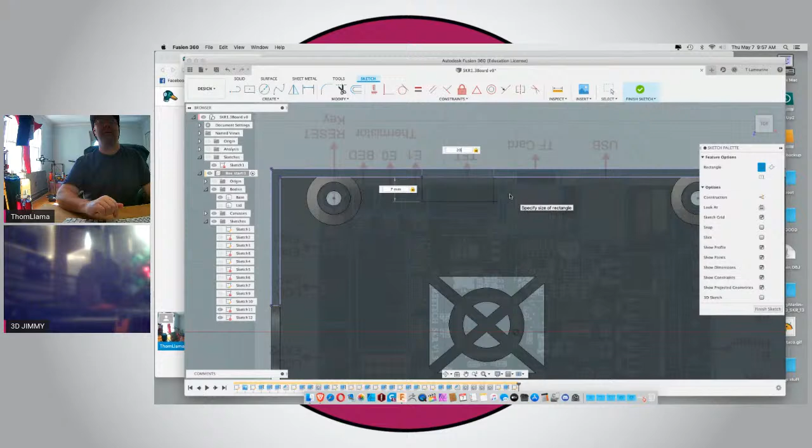Sure. And dimension it—for some reason I think something's not going to be right here. Make it even 42. That gives me kind of a structurally sound thing because it's not right in the corners, but it's not leaving me... all I need is the 2. Yep, that should work.

Any more news from Jim at the Edge of Tech yesterday? I haven't looked. I can't imagine there's a whole lot.

How far down do I want to go? And what's it going to hit? And what's going to be in the way? Yeah, all right, how far down did I go? An even 10. 10.

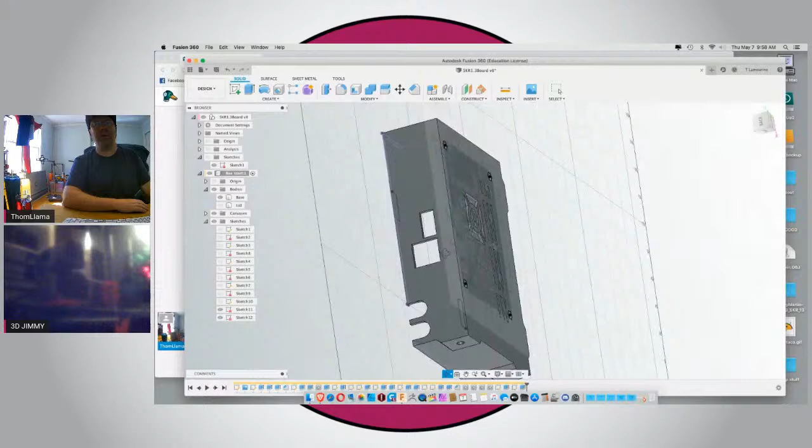And then let's... how do I select that edge back here?

They keep saying you can select through it, but it never lets me select through it. What function are you trying to do? You got to pick the function. I want to select this corner edge that's back right there behind this—you can sort of see it there. Tell it what you're going to do first, pick chamfer or something. Oh yeah, you're right. Yep, that was it. Yeah, there you go, I knew there was something I was missing.

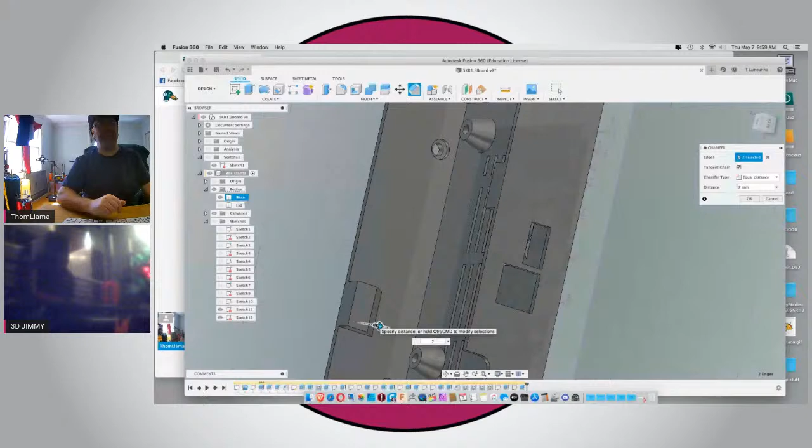And if I do 7, I could leave that perfect, so I don't need any supports. And then let's put the lid back on.

Let's work on the lid here. I want to project that—that's the way it goes with every garage cleaning, Robert, you got to move the same stuff 6 times. And I want to project that, and that, and that, and that.

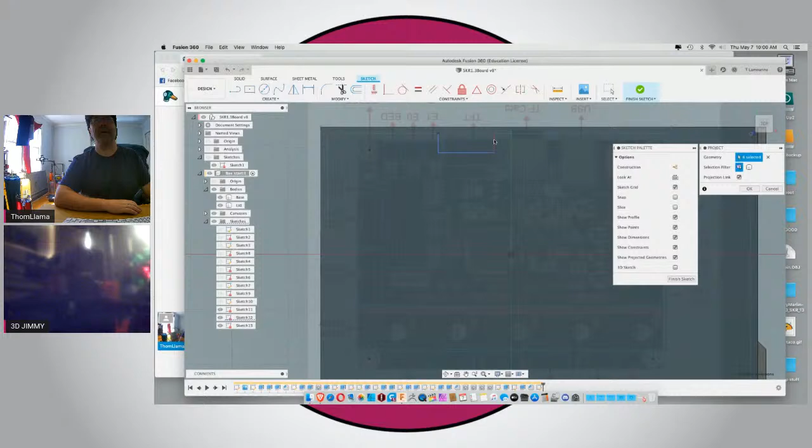Okay. And then I want to put a small hole—I'm just going to put a hole here. Look at the top, and what should I do—an M3? Sure, 3.5. And dimension. This is 10, that should be perfect.

And off of this should be 3.5, but I'm actually going to go a little less—3.25. So it's a little farther out, which is probably not the best thing, but that gets it off of... actually no, I want to go in a little. Yeah, we'll leave it at 3.5, so it's in the middle of it. And do the same thing over here.

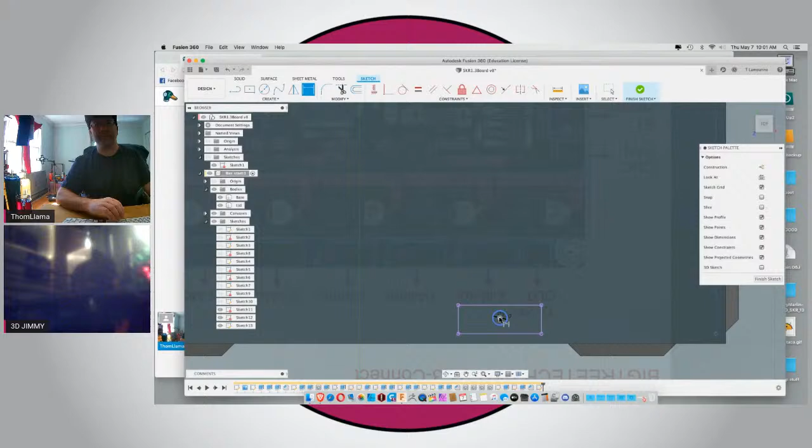Do a 3.5, 3.5, switching. 10—how did it know that already? And... 3.5. 3.5. Done.

What are you going to do, try square nuts in there or just tap the plastic? Huh? You going to put square nuts in there or are you going to tap the plastic? I haven't decided yet. That's 5 minutes from now, man—stop rushing me.

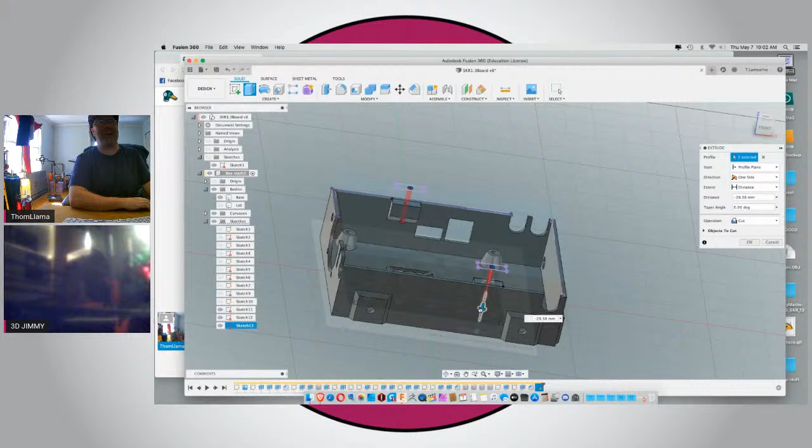Oh, crap. I want it to go all the way down and through to wherever. Let's make the lid hide. So I don't need it to go quite that far, but I need to go about that far at least. Put the lid back so it actually cuts it.

Okay. Let's get rid of the lid. That leaves me those. Let's get rid of that sketch, and that sketch, and that sketch. Let's get rid of the canvas so I can just see the box.

Normally I would inset like a lock nut in there and just glue it into place. That'd be kind of a pain in the butt to do from underneath there. I mean, that's what I'll do here with these. I have lock nuts that size. I'll glue them right into the frame.

I won't even use a regular nut. I use lock nuts with any of that crap when I can. Yeah, I like them lock nuts. I think I might do that right here in the fan too.

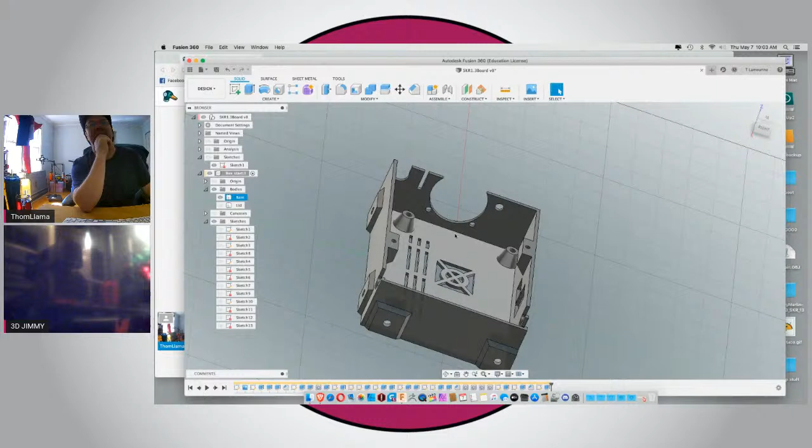Let's save this in progress because I'm about done. It's after 10, I don't think I'll be printing this today because I'm just burnt out and it needs more before I actually print it.

What's on the agenda today? Oh, dealing with my mother. Send your feedback - when the hell did they start that? How did you - I've never seen that. Yeah, they said they were going to start doing this. Just go the frick away. Close.

It's one of the few things I don't like about Fusion - I saved it, which it should have uploaded when I saved, and then you go to quit and it's like, oh, we're still uploading. It's like, you should have done that already, you pain in my butt. It's got to transmit over the web, so it takes a minute sometimes. Yeah, I get it, but I think it should just save to your drive and then upload whenever it can, not when it wants to. You can save that to your computer. Oh, I know, I actually have it so it saves all my files locally, but it still wants to upload to the cloud right then. It's like, wait, I have the file here on my drive, blah blah blah, the next time I fire it up then upload it all to the cloud. Don't do it at the end, do it at the beginning when it's not screwing with - you know what I mean? That way I'm not waiting for it to quit.